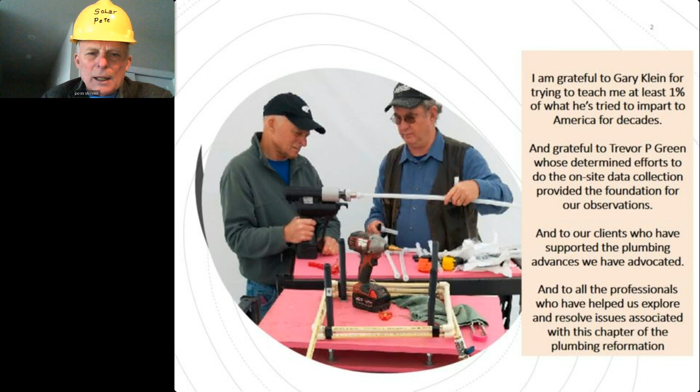I'd like to give you a little information about what I'd like to cover. I started my designing work on plumbing systems with a clean slate—I didn't graduate as a mechanical engineer, I was a civil engineer. But with the same basic information and equations available to me as a mechanical engineer would have, I set out to design plumbing systems for the net zero buildings I was involved with from a solar point of view.

And in so doing, I started with a clean slate. But in so doing, I learned a lot, and that's how I met Gary, because Gary publishes a lot. And together, we've worked on a new approach that we like to call practically perfect plumbing, which reduces installation costs, saves water and energy, and gets the water to the tap fast. And that's what people want.

But I did something a little different. I bought one of these Fluxus ultrasonic flow meters, a very, very accurate device. And I went around my projects and started measuring the flows of hot water that were actually taking place. And I found very low flows, even at the 1 minute duration.

And I started wondering why these pipes were so large. We have really gone forward, and I'll be talking about it as I go forward. The smaller pipes work better. Fat ones are passé. And we're moving forward now by demonstrating that with design, stress, and performance tests of what we do.

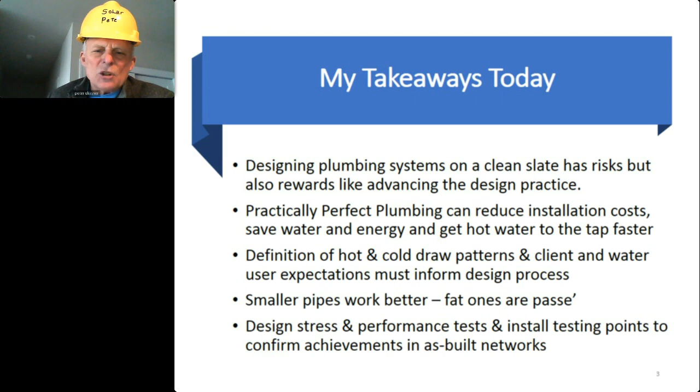So let me just go right ahead because my time is short. The happiest clients are the ones whose installation costs are low. And they see their systems with low operation and maintenance costs. They like to make sure there's no tenant complaints and the water is really clean.

Happy and safe tenants are happy tenants. They're happy because they get their water hot, they get it free of contaminants, it arrives quick, and it comes out with pressure, even when other people up the line are taking draws of their own. Now, we as plumbing designers want happy clients, that's for sure. We don't want any operation and maintenance embarrassments, and we certainly want safe water quality.

What does the world want? Well, it wants reduced waste of water and reduced waste of energy. Is there anything else? I'm sure you can come up with a few others. But these expectations are risky, and people who do this for a living sometimes want to just oversize the pipes and sometimes complicate the networks so that pressure is there for everybody.

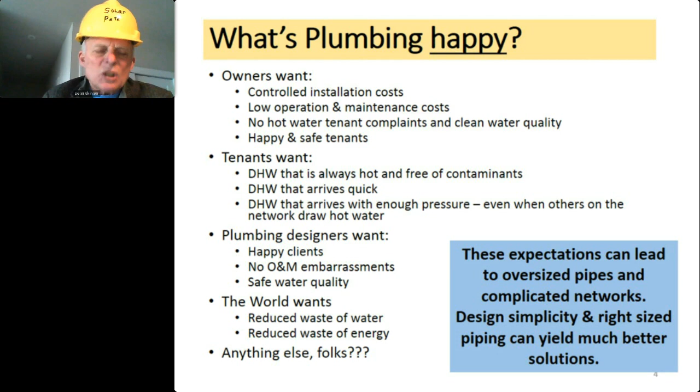We have designed systems that take this to a much smaller size pipe and still have the pressure and deliver the water quickly. The next slide shows one of our great adventures, and this occurred during lockdown.

The experience that I had - I'm right now at Solara outside Schenectady. The room rings because it'll soon be occupied starting next week. I'm here to do some last minute adjustments of the plumbing system and the solar system before people move in.

But I had some extra time, and Gary and I were talking, and we realized that Beacon Communities, which owns 20,000 apartments across 15 states, was building a second phase of the Meadows Senior Housing out near Utica. Well, I knew how much hot water the people were using because he already completed phase 1 buildings, and it wasn't very much water. And when I saw the plumbing inside that building, I just couldn't believe it.

3-inch pipe, 2.5-inch pipe. Why do they need pipe that big to take small amounts of water? So I wanted to make sure I wasn't wrong about this. Maybe I measured it wrong. So we bought a very expensive magic box from Hugh Henderson.

Hugh Henderson is a metrologist. He's unbelievable. He's outside Syracuse, and he's retired. But I got him out of retirement long enough to build me a magic box, which has another great flow meter and a connection to his data cache and communication capability with all kinds of statistics and all kinds of stuff. Just great.

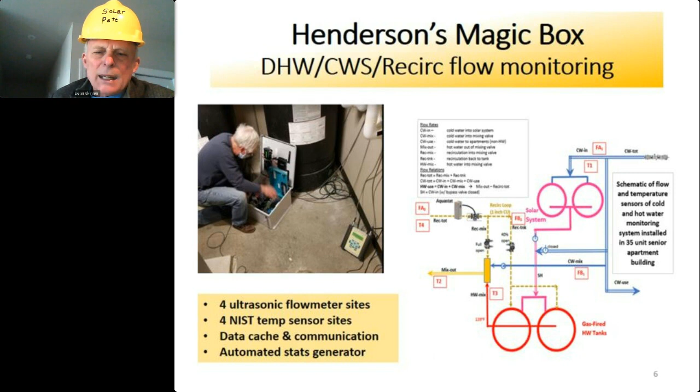And we started to monitor these buildings that Beacon owned, one of which was a Phase 1 Meadows building. And we were delighted to see that my original numbers weren't any different. We measured maximum hour levels for 35 apartments at 106 gallons. That's not a whole lot, let me tell you. And their maximum flow rate was around 1, maybe 2 gallons a minute for short durations. Now, you might want to know, why would you have a 2-inch pipe to carry that little bit of water?

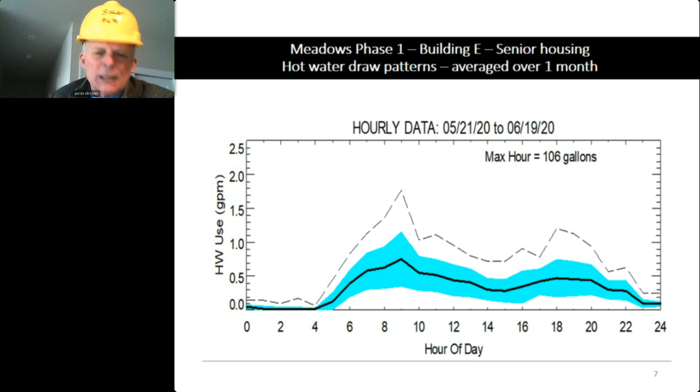So, and my son helped me out with the statistics that I'm not as good with, the cumulative frequency. And you can see here that for Meadows, at the 99 percentile level, the flow was 2.63 gallons a minute max. Now here at Solara, where I'm at right now, we have a more mixed occupancy, not all seniors, and we get something like 4 gallons a minute at the 99 percentile return frequency.

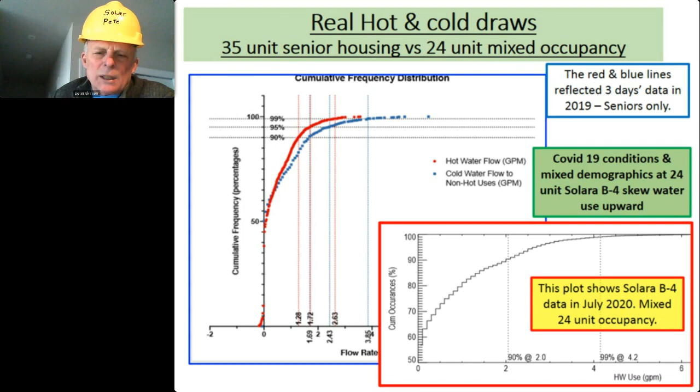So, you know, you've got to look at the building to make a good decision. So let me get back to Meadows. At Meadows, this was the Phase 1 design.

If you look here, there's a couple of water heaters, goes into a 3-inch pipe, then a 2.5-inch pipe, which leads to a 2-inch pipe that goes all the way across the ceiling of the 3rd floor. Then, all the way along, it goes out on branches that drop into downward risers, and returns to the recirculation, at 15 gallons a minute. And this is where you're getting flows of 2.63 gallons a minute max.

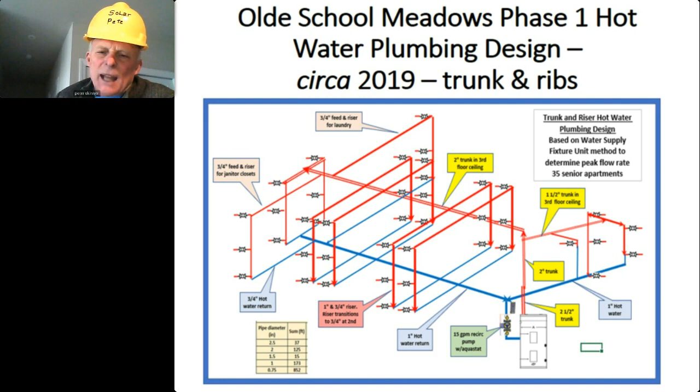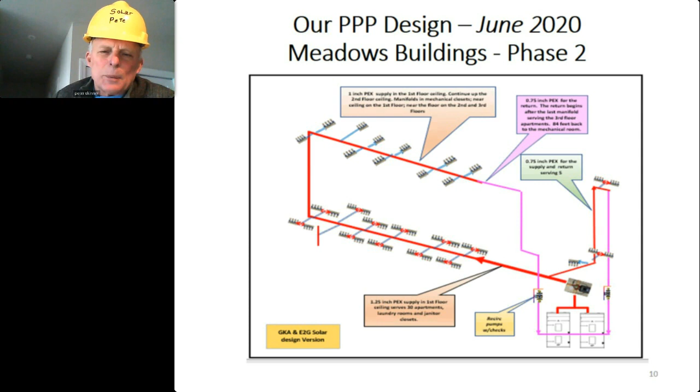When we talked to the plumber, he said, geez, I've been wondering why they've been using such big pipes. So we had an ally there, and the owner was quite excited about making a change, even though construction was underway. So this was a Hail Mary pass that Flutie would have been really proud of, trying to change horses midstream. So we looked at our layout versus theirs.

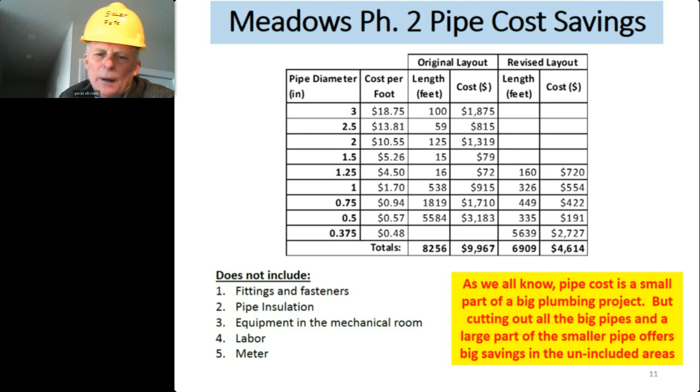We got rid of all the 3-inch, the 2.5 inch, the 2-inch, the 1.5 inch pipe. We cut back on the 1.25 inch pipe. We even cut back on the 1-inch pipe and the 3/4 pipe. The only thing we made a lot bigger was the 3/8-inch PEX home runs to fixtures. And yes, that was a lot of pipe, but it wasn't insulated, didn't have to be insulated. Overall, just for the pipe, we went from roughly $9,000 to $10,000 worth of pipe down to $4,600. That's not even counting pipe insulation, fittings, labor, and equipment in the mechanical room, which we also made smaller.

So it got put in. I went out and inspected the installation, and thank God I did, because I identified the fact that the plumber misread the plans and made one loop instead of a main one and a little one. Wow, it's good I caught that.

I went out with a protocol and a whole lot of calibrated gauges to identify what the pressure change would be from the beginning in the mechanical room of the cold water all the way to the wand in apartment 303 at the end of the loop. And you'll see that, yes, there was a definite pressure reduction.

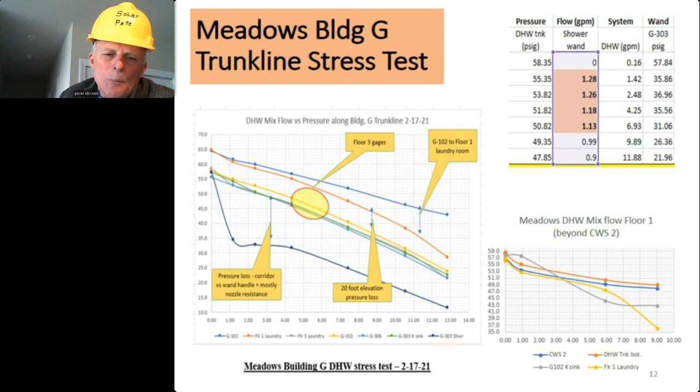But even up to 4 gallons a minute, which is much more than 2.63, we still had over 30 psi available to run the nozzle on the shower wand. Yes, there's a big drop between the trunk and that wand, but that's made up of the branch, the manifold, the twig, the valve, and the wand hose. That's a lot of little pipe to get through, and it still had more than 30 psi to run the nozzle, and it worked great.

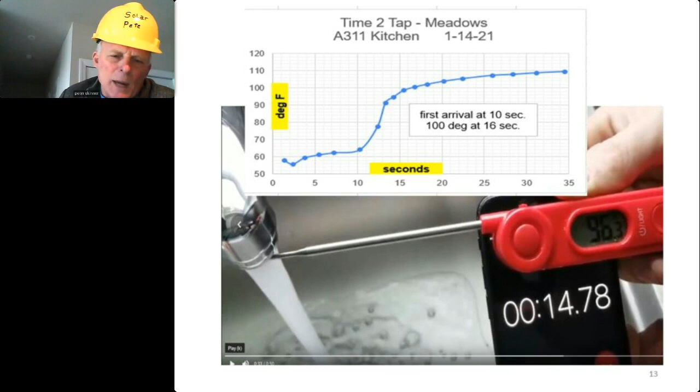Then I wanted to check out something else. I wanted to make sure that our promises that people would get hot water quickly were met. And in fact, even for the first draw in the apartment, warm water arrived in 10 seconds, and at 16 seconds we had 100 degrees, more than sufficient to wash your hands and even begin to take a shower. Now, for the second draw at a sink or a shower or any other use in the apartment, we're talking 5 seconds. So it's that first one that's important indeed, and we were able to bring it in at a matter of seconds.

There's another issue. These trunks, of course, act like radiators, and if you don't insulate them, you lose a lot of heat. We noticed in the early phase 1 buildings, they were losing something like 180 million BTUs per year into the building. To me, that seemed like a lot of heat - heat that was really going to waste in the summertime for sure, and the HVAC system had to take it back out. That was crazy.

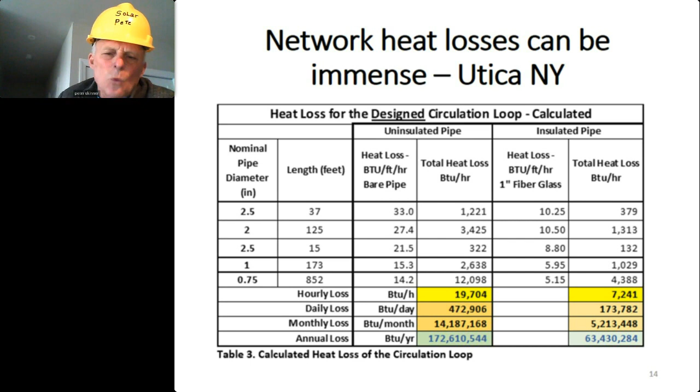Gary then went ahead and calculated what would happen if that pipe had been insulated, because we guessed it wasn't insulated, and that reduces it to 63, almost a 2/3 reduction in the phase 1 buildings. But we wanted to know what our loop would do.

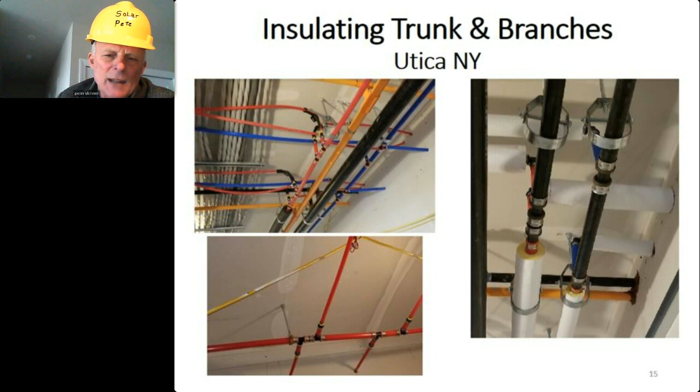So when I went out, I made sure that the insulation you see over here went everywhere, all the way right up to the manifolds that had the 3/8 inch home run PEX, 3/8 inch PEX to the fixtures. And just this was 3 weeks ago. I said, gee, I've really got to make sure that trunk line loss in our system was not a problem.

And in fact, what we did was we were able to run 3 gallons a minute through the whole loop, and it approached 1.87 degrees. That's the difference between the mix out and the return temperature. That's the whole loop, including the recirc. And that's only less than 2 degree loss at 3 gallons a minute.

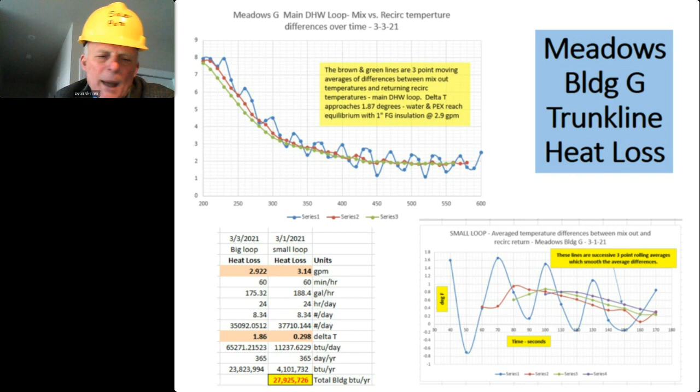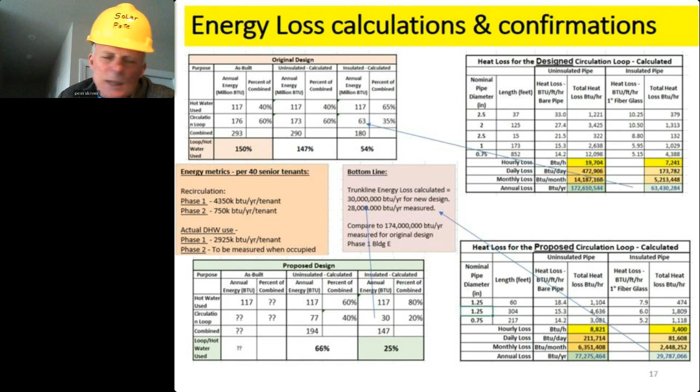When I did the math, that comes to about 28 million BTUs per year. Compare that, if you will, against 180 million BTUs per year. That's a reduction of about 85%. And you can't beat that. And so we feel very gratified with what we did. And the math is here if you want to download it. And we're happy to discuss this because we're really gratified with the results.

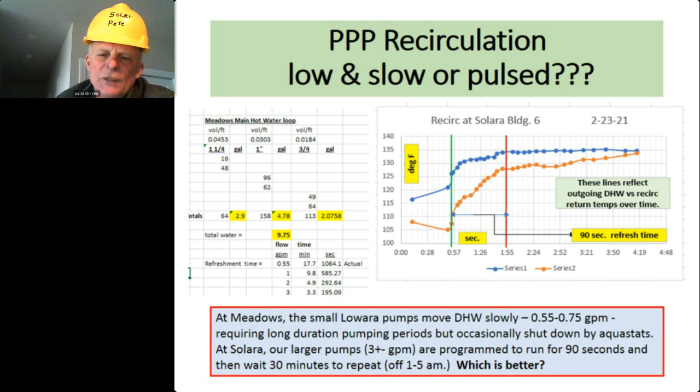I just want to sum this all up. The plumbing revolution is here now. Gary talked about it, but he talked about a lot of things last week. I want to make sure you get it, that smaller pipes are in, fat ones are out. Practically perfect plumbing can save energy, install costs, water, and get the hot water to the tap even faster. And you make tenants happy, and that's really the bottom line. We've made it work. Others can do it too. And Gary and I can help.

Here is Plumbing Engineer. Gary and I wrote stories about what we did, 7 of them actually, and we'll have an 8th coming out fairly soon about the experience at Meadows. It's in Plumbing Engineer in 2020, and you can read about it there.

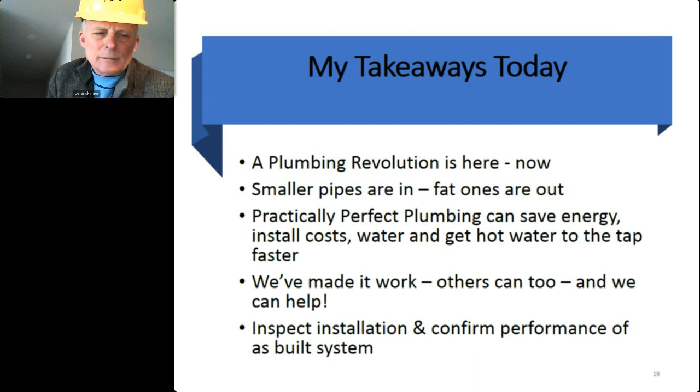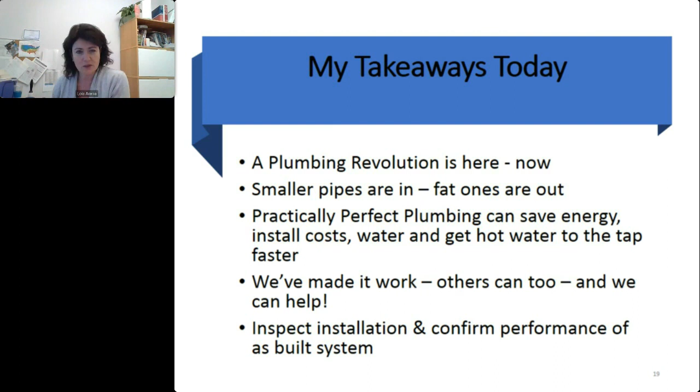Our next speaker is Jack Aitchison, an energy engineer at the Association for Energy Affordability in Emeryville, California. Jack has provided engineering and technical support for various comprehensive energy efficient decarbonization retrofits for multifamily buildings throughout California. He is always looking for new innovative technologies or strategies to conserve energy and reduce greenhouse gas emissions in multifamily buildings. Jack will take a look at recirculation pump controls and crossover issues for existing multifamily buildings, hidden challenges and solutions. Jack?

Thank you, Lois. I will be presenting on recirculation pump controls and crossover issues for existing multifamily buildings, hidden challenges and solutions. So we'll be looking at 2 different recirculation pump control strategy types, demand controllers and variable speed recirculation pumps with temperature controls, looking at how they performed at saving energy in 5 multifamily buildings in California.

So just a quick overview of a multifamily recirculation system. We have our recirculation pumps circulating hot water 24/7 throughout the building. Now, the idea here is that even the tenant furthest from the water heater will have hot water readily available in a timely manner.

And like I said, that pump is typically running 24/7. So by adding controls to limit the runtime of that pump or limit the speed of that pump, we'll save pumping energy. But the focus of this presentation is going to be on the water heating energy it saves. So the lower speeds, the less time that pump is running, the less water that is returning into that water heater, and the less water that that water heater has to reheat and send back out into the loop.

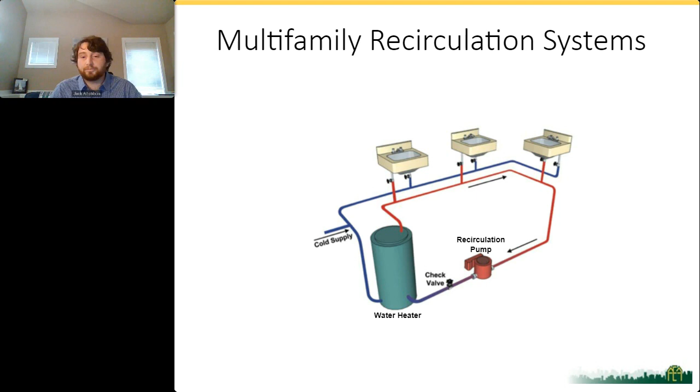So the pump control strategy types we'll be looking at today are recirculation pump demand controllers. The recirculation pump demand controller connects to an existing recirculation pump. It has a flow meter that connects to the cold water makeup and a temperature sensor that connects to the return line, reading water temperature in the return. Now, this control strategy allows that loop temperature to fall below usable temp, typically below 105 degrees. And when that temperature is below that usable temp and there is a draw for hot water, the pump turns on. So it's a fairly aggressive control strategy type.

The other control strategy type we'll be looking at are variable speed ECM pumps with temperature controls. This is a direct replacement for the existing pump, and how it works is it fluctuates speed based off return water temperature. So typically we set that pump to be about 20 degrees less than the supply temperature going out. And a single speed pump that's continuously running, we typically see return water temperatures around 5 degrees less than the supply. So it's a fairly large increase in the differential in temperature between the hot water supply going out and the return water coming back.

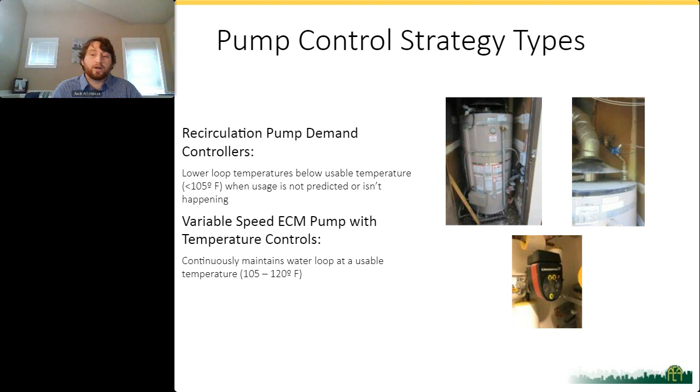So as I mentioned, we're going to be looking at 5 projects which installed either a demand controller or a variable speed recirculation pump and see how they actually performed at saving water heating energy. Now, these 5 projects all have central water heaters, and those water heaters are gas. So we're going to be focusing on the gas common area meters. In blue is the projected variable speed recirculation pump savings, and in orange is the projected demand controller savings.

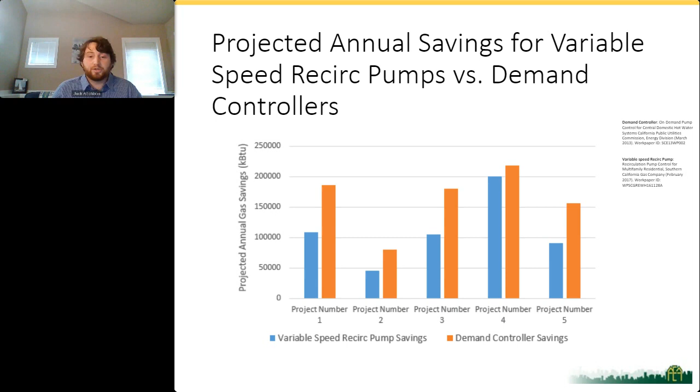Now, one caveat to these 5 projects is they all were enrolled in energy efficiency rebate programs in California. So in order to be eligible for those rebates, they had to do a pretty comprehensive scope of work. So we picked these 5 because we were best able to isolate the recirculation control savings from other measures that they completed.

So starting with property number 1, this property installed a demand controller. It's a fairly large property. It has 80 units and 1 water heating plant with 1 recirculation pump. However, there were multiple risers and multiple recirculation loops. And the scope of work included demand controllers, low flow shower heads and aerators, as well as 1 central washing machine upgrade. Now, a quick note on that scope of work, the demand controller was projected to be the highest energy saver of those measures. So it should have the most influence on the savings.

Now, the dashed line in the graph is predicted gas usage after construction, and the solid orange line is the actual gas usage post-construction. So as you can see, we are not seeing the savings that we anticipated for this project.

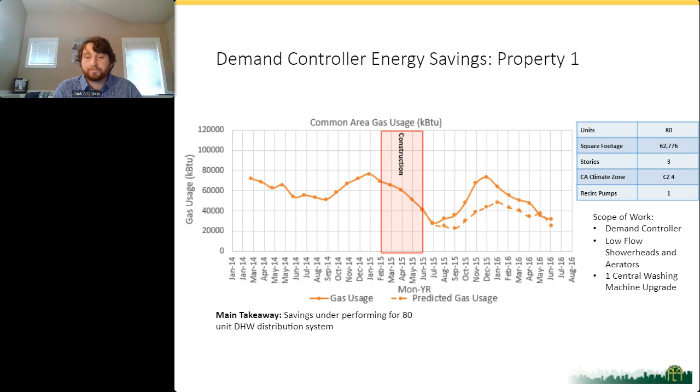Moving on to property number 2, this property was 34 units, 2 water heating plants, each with their own recirculation pumps, so a smaller recirculation system serving 17 units each. Similar scope of work to the previous project, demand controllers, low flow shower heads and aerators, 4 central washing machine upgrades, and pipe insulation in the boiler room.

Now, a fairly interesting event happened at this property where after construction was completed, we saw the gas usage ticking up. And there was quite a bit of back and forth between us and the building owner trying to dial in that demand controller to figure out why it's increasing the gas usage. Well, it ended up actually being a leak in the distribution system. So once that leak was repaired, we were actually seeing savings that we anticipated at the property, which was great.

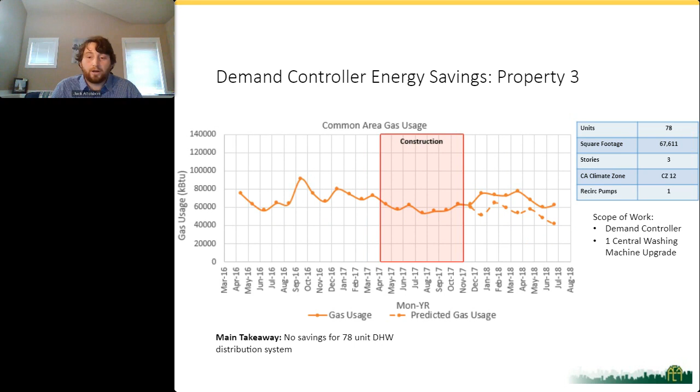Property number 3, very similar to property number 1, 78 units with 1 central domestic hot water heating plant and 1 recirculation pump. However, there were multiple risers at this property. And this project, we were best able to disaggregate the savings from other measures because there was only 1 central washing machine upgrade included in the scope that affected the common area gas usage. So this property, we are fairly confident that the demand controller is the main energy saver for the common area gas. Now, as you can see, the savings again are not as anticipated, and we're almost not seeing any savings at this property.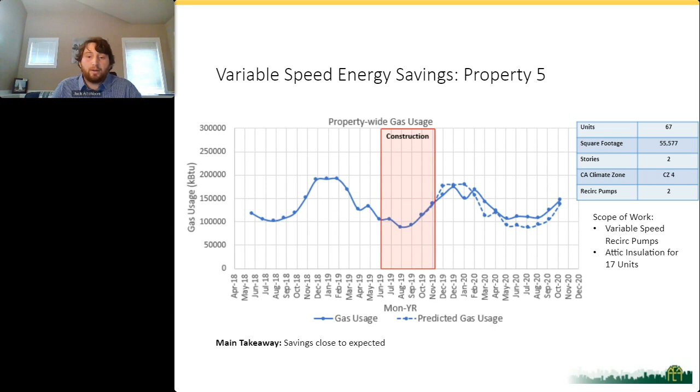Here we are at property number 5. This is the final property. One quick note on this property, it was the only property that was master metered. So we were unable to disaggregate the gas usage to show just the common area gas usage. However, the only measure that affected gas usage at the property besides the variable speed recirculation pump was attic insulation.

17 units had gas heating, so you were also seeing the savings from adding attic insulation to those 17 units. Now, this property was close to what we anticipated, but it's still underperforming slightly. It's a medium-sized distribution system. There are 2 hot water plants, each serving around 33 units.

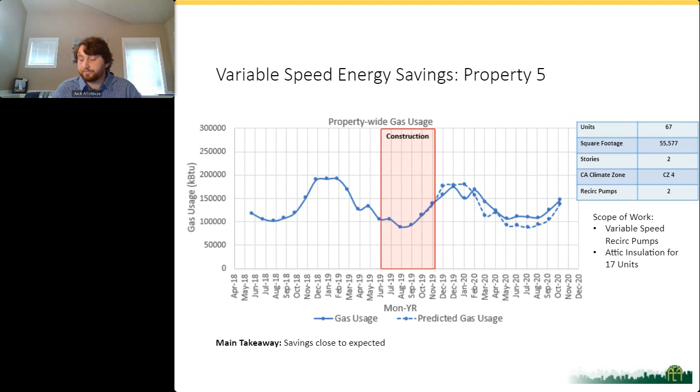So why are we seeing a discrepancy in savings? Well, there's the obvious issues like project number 2, where there was a leak, underground piping, uninsulated piping, really anything that leads to high conductive losses in the distribution system can result in demand controllers or variable speed recirculation pumps being overridden. And so we end up not seeing the savings that we anticipated.

But in this presentation, we're going to be focusing more on hidden issues in a domestic hot water system, more specifically domestic hot water imbalance and domestic hot water crossover.

So starting with imbalance, we see the figure on the top right. When you have a larger distribution system and you have multiple risers, water wants to flow in the direction of least resistance. So the smallest loop is going to have the higher temperatures and higher flow rates, and it's going to basically short cycle the system. Now, for this loop, because it's so far away, it's going to have lower flow rates and lower temperatures.

With crossover, you have cold water leaking into the hot water line. This occurs at plumbing cross connections, and more specifically, it more commonly occurs at single handle shower valves with failed mixing cartridges inside of them. So when you have the cold water leaking into the hot water line, that cold water joins the distribution. It can mix with the hot water. It can create cold water slugs, and effectively it affects the tenant's ability to get hot water. Their water is going to fluctuate in temperature, that sort of thing.

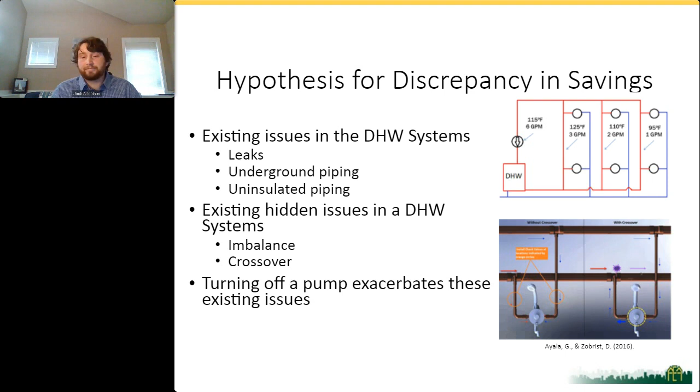Now, quickly on imbalance repairs, one of the best ways to repair imbalance is by installing thermostatic balancing valves on the riser returns before they connect to the common return. Thermostatic balancing valves, you're able to set these at a certain temperature, and it's going to constrict flow based off that temperature. And essentially, it allows you to have a uniform temperature profile throughout all of the risers at the property. Now, crossover repairs are a little bit less intuitive. Sometimes, it really takes a lot of time to investigate the building and determine where the crossover is occurring.

It's typical that crossover happens at single-handle shower valves. The gentleman on the left is installing one-way flow check valves on the pipes leading to the shower. This doesn't fix the crossing over at the shower valve, but it does eliminate the chance of cold water leaking up that hot water line and joining that distribution.

Stepping back to those check valves, it's fairly rare that we're able to actually access those areas. And if we are able to access them, you also want to make sure that you can access them again to maintain those check valves, since sometimes they get stuck open and require maintenance. So you want to have access panels to those.

A more common repair, since you don't always have access to those pipes, is just replacement cartridges. Here we have a 1225 Moen cartridge, a direct replacement for the 1200 Moen cartridge, which is a fairly common shower cartridge susceptible to crossover. We also have a Nomix shower cartridge, a direct replacement for Mixet shower cartridges, which are susceptible to crossover, as well as the Moen 1200 cartridge.

On the right, we have a fairly rare situation, but it does happen. We were at this property and went into almost every unit, and every unit had two-handle shower valves, which are less likely to have crossover. So we were fairly stumped until we went into the laundry room and saw this pipe connecting a laundry hookup, where the plumber or whoever removed the laundry machine found both valves broken—one hot, one cold—stuck open.

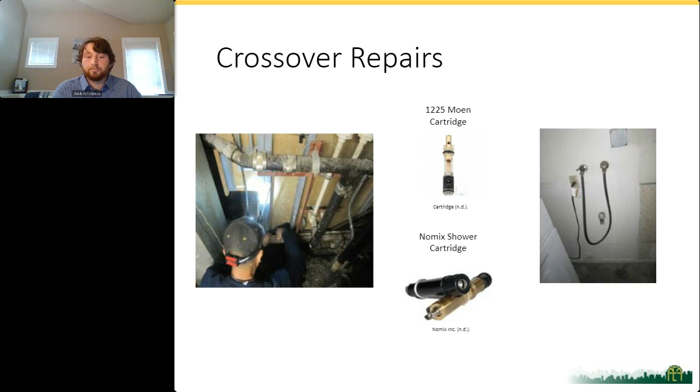Here we have a graph showing in red the supply temperatures and in orange the return temperatures of a central domestic hot water system. This property actually installed the check valves from the photo on the previous slide, and the black line indicates when those check valve installations were complete. As you can see, before the check valves were installed, the return temperature was fluctuating quite a bit, and we're seeing a large difference between supply and return temperature.

One quick note on this property: this project actually replaced an existing gas boiler with a central heat pump water heater. One thing to note about central heat pump water heaters is that because they have slower recovery rates than gas water heaters, you want to make sure any distribution issues like imbalance or crossover are fixed before doing that installation, because they're unable to mask these hidden distribution issues to the same extent as a gas water heater.

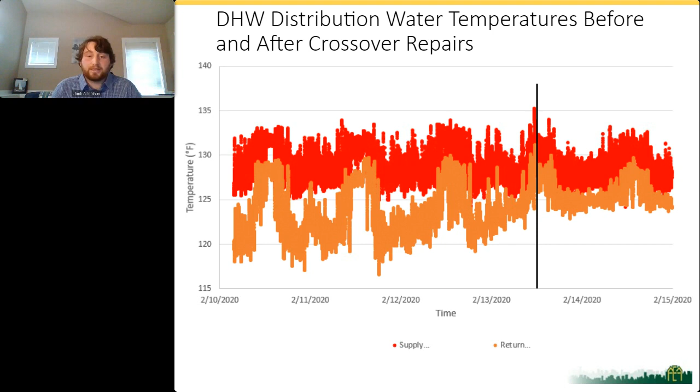Finally, conclusions. It should be standard practice to include crossover and imbalance investigation and repairs when you're working on installing recirculation controls or central heat pump water heaters in buildings.

For new construction, looking at reverse returns will allow you to eliminate any potential balancing issues. Also, installing thermostatic balancing valves at the riser returns allows you to eliminate any potential imbalance in the future.

You can also install check valves at the showers in order to avoid crossover in the future, but also some fixtures have integrated check valves within them—kitchen faucets and bathroom faucets as well. So installing those fixtures with integrated check valves is also an option to avoid crossover issues in the future.

Finally, when you have a property that may have some crossover or imbalance, but it's not very significant, you can still install a variable speed recirculation pump, because the savings are going to be more resilient to existing domestic hot water distribution issues. But my recommendation is, if you are planning to install any sort of recirculation pump control strategy, you want to make sure you fix these crossover or imbalance issues to ensure you're getting the savings you were projecting.

Our client is the statewide codes and standards utility program. They work with the California Energy Commission to develop new building codes and appliance standards. This project is mainly focused on improving Title 24 building energy efficiency standards and will inform the 2022 Energy Code. The efforts to improve the way that heat pump water heaters are treated in the software is a collaboration funded between Southern California Edison and PG&E.

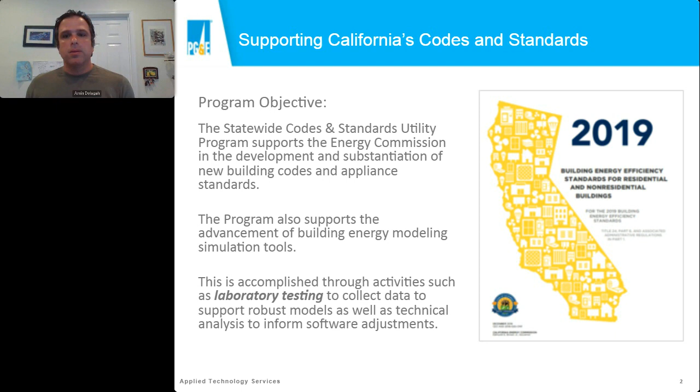So before we dive into the discussion of valves, here's some background on the heat pump application testing that is currently underway. The project technical leads are Colin Grist and Paul Kintner at Ecotope, and also Ben Larson with Larson Energy Research. In this testing, we're running 24-hour hot water system tests using small, medium, and large water draw profiles, and we're trying to see how the system performs in various configurations. Thus far, we have completed testing on 4 and 8 unit apartment prototypes in the laboratory.

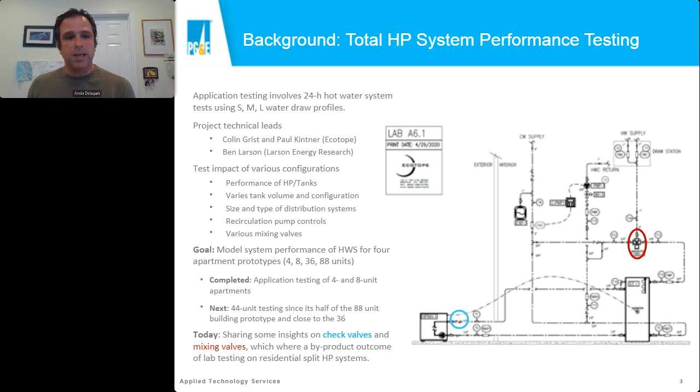But an alternative is spring check valves. The spring actually provides a positive seal for greater backflow prevention, and spring check valves also minimize the effect of water hammer. So they're definitely a good alternative. The drawbacks are that you usually need to order these, and they require specification of the spring cracking pressure.

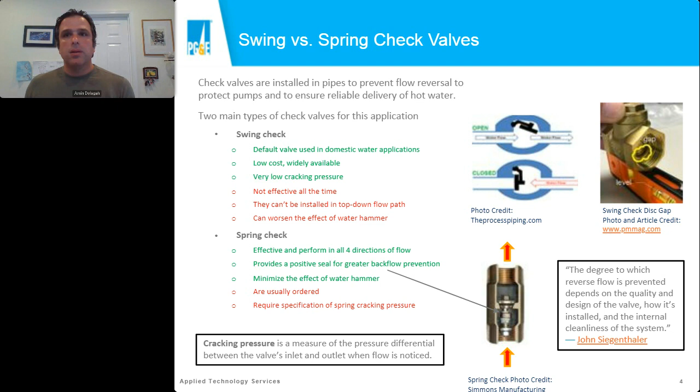So in the laboratory, we were having issues with these swing check valves. The swing check valves did not stop the reverse thermosiphoning when the heat pump, which is the heat source, was not operating, and thereby was acting as a heat sink. Thus, hot water from the top of the tank started to, in a slow but consistent reverse flow path, flow backwards through the heat pump, which also causes additional heat losses in the system.

More importantly, this persistent reverse flow caused the heat pump's internal pump to not activate during the compressor startup sequence. So we were having problems running our tests, as this persistent flow was causing our heat pumps to not turn on, and these are 24-hour long tests. This did actually cause a testing issue, but this can definitely occur in the field in an apartment building. So the way that we solved this was to install spring check valves with a 0.5 psi cracking pressure, and it solved this problem.

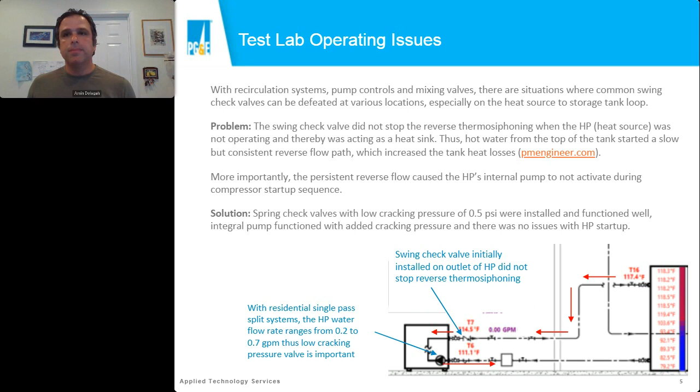Switching from this conversation of check valves to mixing valves, you might be asking why we are using mixing valves in these small multifamily buildings. Well, this is because heat pump-based hot water systems generate and store water at really high temperatures, and they rely on temperature stratification in the tank for the operation of the heat pump, as well as to maintain high COPs and to maximize the energy storage in the tank. Thereby, the mixing valves are necessary to reduce the storage tank outlet temperature to 120 to minimize the scalding risk, and also to deliver comfortable shower temperatures.

There are 3 types of mixing valves that we have tested thus far for these 4 and 8 unit apartment buildings. They include the Lawler valve, the Honeywell mechanical mixer, and also the Leonard electronic mixing valve.

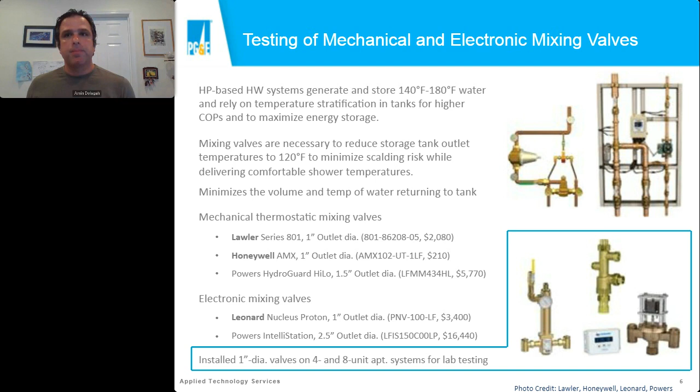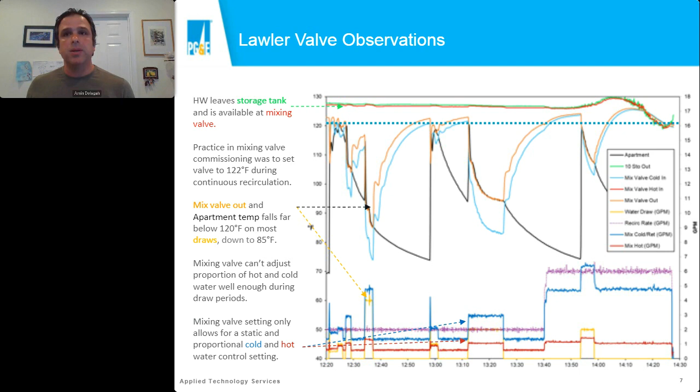Moving forward, what we found out was that these types of thermostatic mixing valves are best suited for large office buildings that have continuous high recirc flow rates, relatively large volume distribution systems, and low draw volumes and draw times. So therefore, they're really relying on the distribution system to moderate the temperatures getting to, say, hand sinks. And they're not designed, at least from the experience we learned in the laboratory, for the much higher flows we see in multifamily buildings.

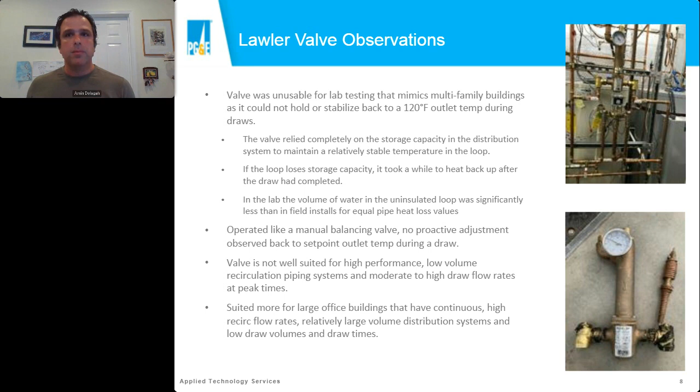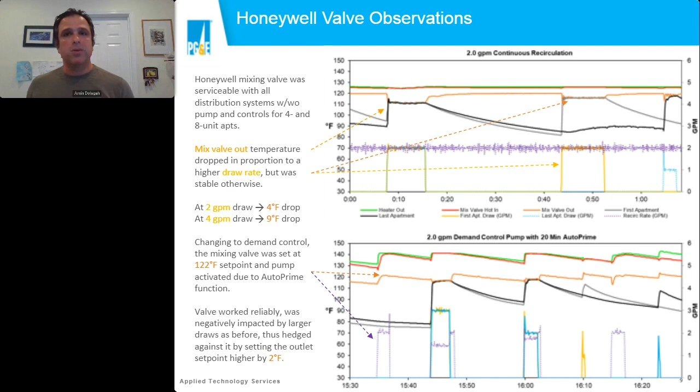What we found is that this type of valve is serviceable, works with different applications, and is also very low cost. So it's very feasible for buildings to use this type of valve.

Moving on to the Leonard mixing valve. This is a digital mixing valve, and it does fine even at very low recirc flow rates, but it does struggle with continuous recirculation systems and demand control systems.

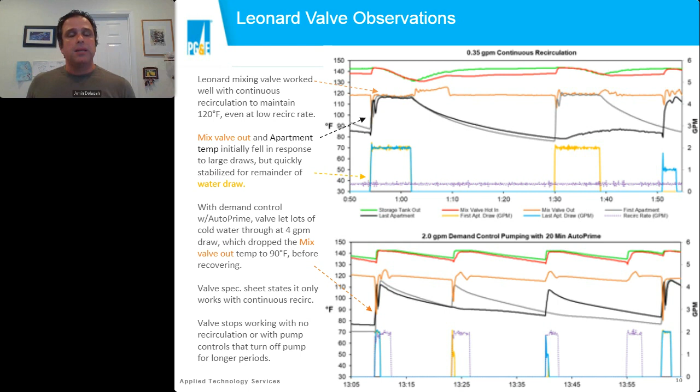I know I'm short on time, so I'll quickly go through to the final slide. Ultimately, what we saw is that proper specification of valves has an oversized impact on system performance. We put together this table that compares electronic and thermostatic mixing valves across various types of recirculation.

What we saw is that electronic mixing valves work really well with continuous recirculation, but are currently not set up well to work with no recirculation or with any kind of long duration pump controls. This particular valve just turns off—it's not able to mix after a certain time period and has to be reset.

The thermostatic mixing valve, the Honeywell valve, worked really well. It was serviceable for everything, but it also struggled at low flow rates.

To conclude, we've studied check valves and mixing valves, but there's another type of valve, balancing valves, that's also really important for us to look at. They're used in mid to high rise apartment buildings. The work we'll be doing next is on distribution systems, riser distribution systems, and Yanda is going to get into that right after this.

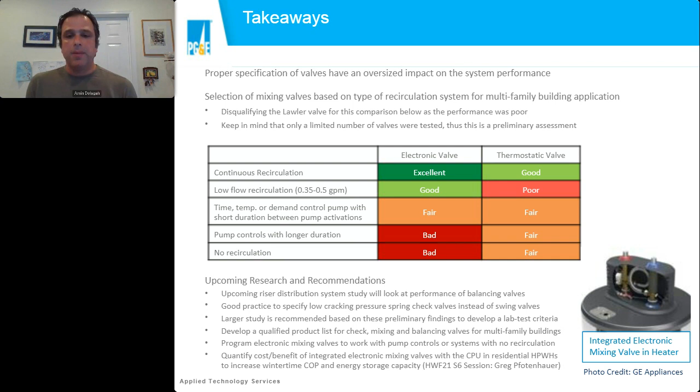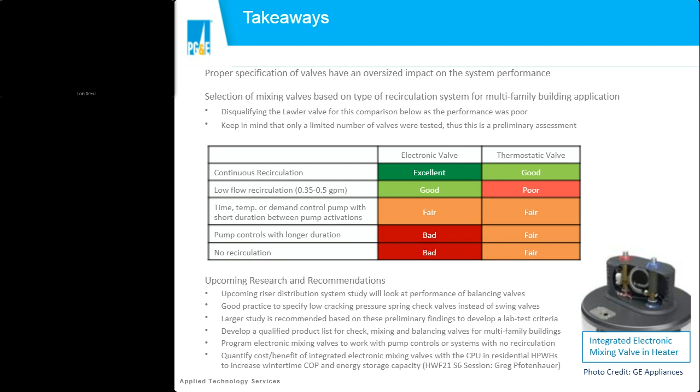And so, Amin, I'm going to jump in here. We only have 5 minutes left for the session, so we better let Dr. Zhang get on. Sorry, Yanda, take it away. No problem, I think I'm fine.

I think Peter, Jack, and you have set things up and talked a lot about related issues, so I don't have to repeat them, and my presentation can be brief. The presentation I'm providing relates to a study we're in the process of conducting, so we don't have any actual data to show you yet. It's more about presenting the approach and the idea to get your feedback, so we probably don't need that much time.

So the project we have here is trying to figure out how do we test a 3-story recirculation system in a lab. That's the problem, and why are we doing that?

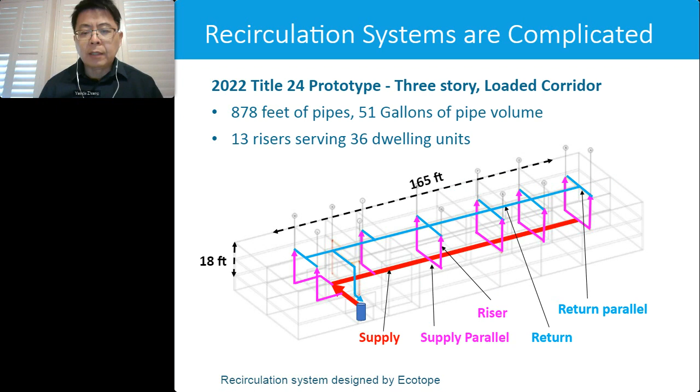Peter already explained that recirculation is really massive and wasteful, with a lot of pipe leading to a lot of heat loss. Previous studies suggested about 1/3 of the energy input into the water heating system is just used to sustain the recirculation system—1/3, that's a lot. How do we reduce that?

Better design. Peter discussed one option: significantly reduce the pipe size, reduce pipe surface area, reduce heat loss. Good insulation is always a good solution. And once you have a system in place, how you control it can make a difference. Jack explained some of the issues he identified—I concur, we saw the same issue. It's related to the imbalance.

It's related to the crossover flows. On top of that, now we have the need to move towards using heat pump water heaters. Then the return temperature from the recirculation is also very important.

This all leads us to have a better understanding of how the recirculation system actually works, in detail, how the delivery temperature to individual units is affected by the recirculation flow, control, and imbalancing issues. Those are hard to study in the field because the pipes to individual units are just not accessible, right? They're inside the walls.

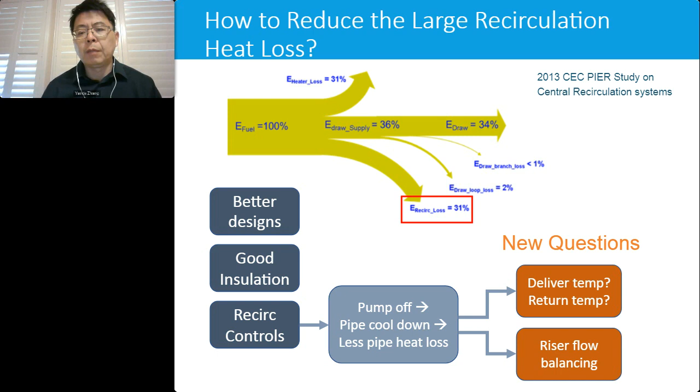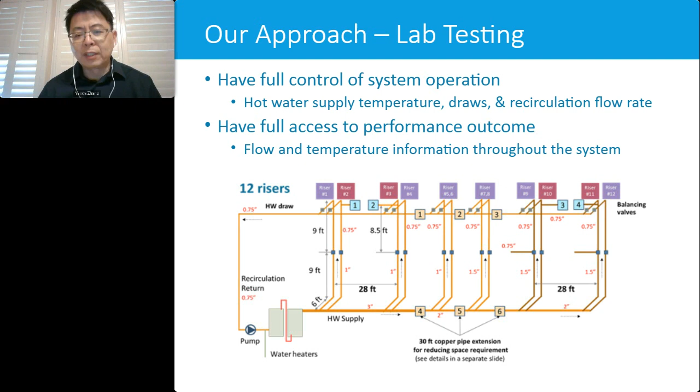So that's what we're going to do. How are we going to do it? The general approach is that we're actually going to use an actual-size recirculation system. But obviously we're not going to build a 3-story apartment, so what we do is basically fold the pipe runs into a much tighter space.

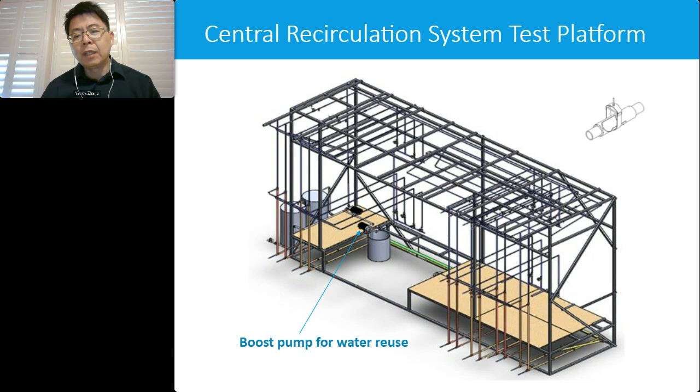This is the actual design of the testing system. It's still pretty large, but definitely not anywhere close to a 3-story building. You can see we have supply pipes, 3-inch, at the bottom, representing the first floor ceiling of a building, and then the risers going up to the third story ceiling and back to the return.

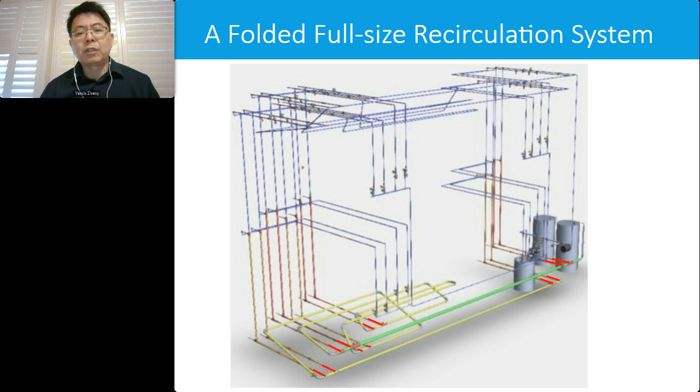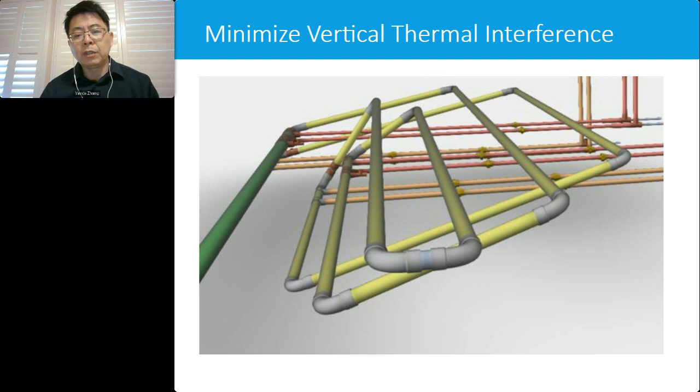Another picture shows a slightly better view because we removed the frame, so you can see the supply. How do we fold it? You can see the zigzag of supply pipes instead of a straight 160 feet long run—we bent it so it fits into a small space. This is a better view of how the pipe runs; we arranged it so they don't sit on top of each other and interfere. This way they're a bit more separated.

So once we have the system set up and working on it, we can test the system under various conditions. For example, we can vary the recirculating flow rate and try to see what's the minimum flow rate at which you can still have satisfactory hot water delivery—where the temperature isn't too cold for the last unit.

Along the recirculation system, we can also use different balancing valves to test how they help improve flow balancing, and try different control strategies under different draw schedules. This will lead to a lot of test conditions—we won't be able to test all the different combinations, so we'll adjust them according to our test results.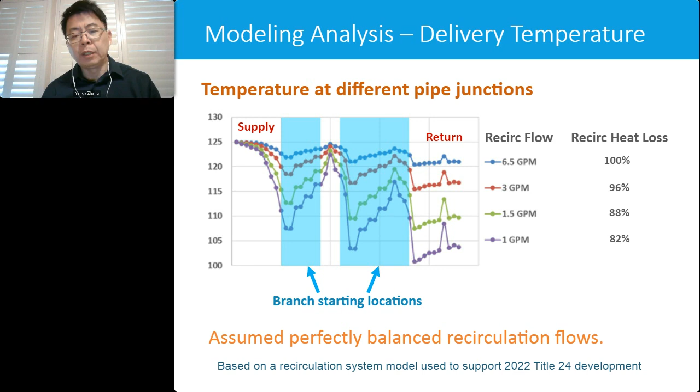This is an additional analysis to simulate what happens if we have pump control that turns off the pump, and how that would affect temperatures at different locations throughout the recirculation system.

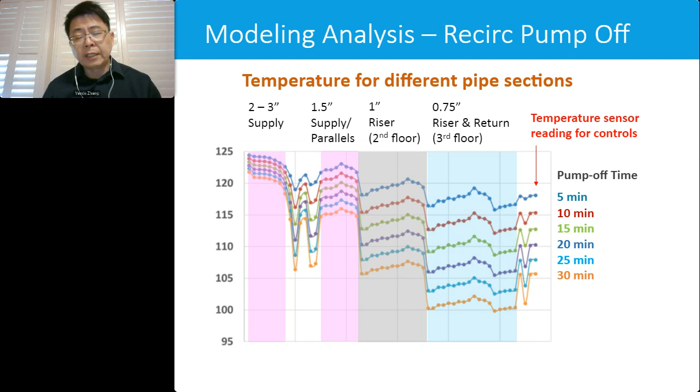That said, we don't have actual measurement data to show you, but we hope we've provided enough information to let you know this is something we're doing. We'd love to get feedback from you on what else we need to consider, and what additional issues we should look at. Thanks—here's my contact information.